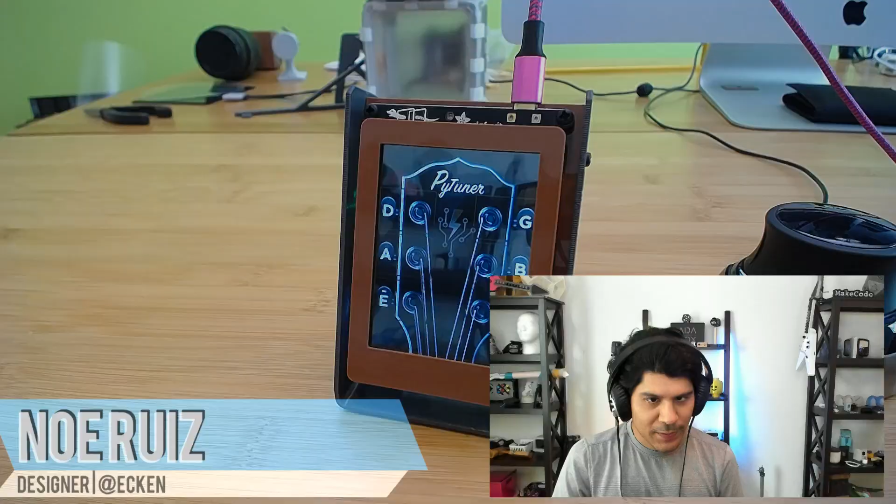In today's tutorial, we're going to take a look at the Guitar Tuner project. This is a collaboration project with Liz Clark of Blitz City DIY.

This uses the Adafruit PyPortal, and what we've done is we created this two-piece enclosure slash stand, and the Guitar Tuner has this nice touchscreen with some graphics.

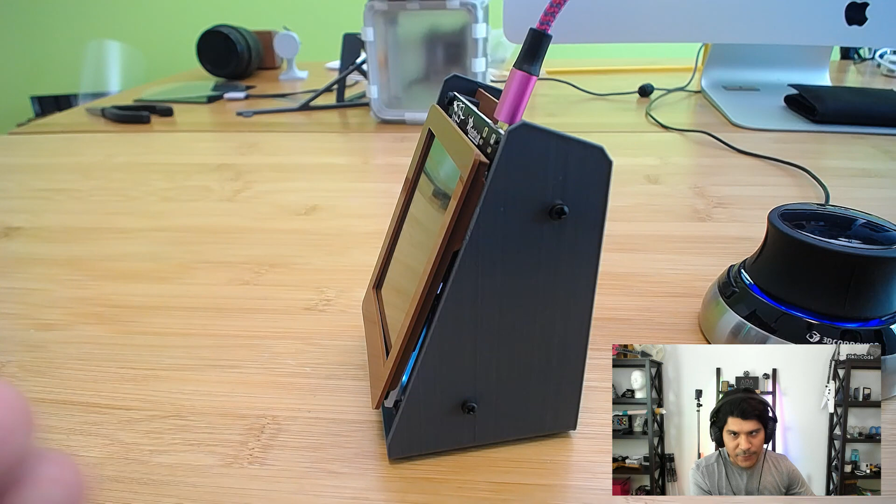So you can tap on any of the pegs and get some audio so you can tune your guitar. I really like the way that this is housing the Adafruit PyPortal vertically.

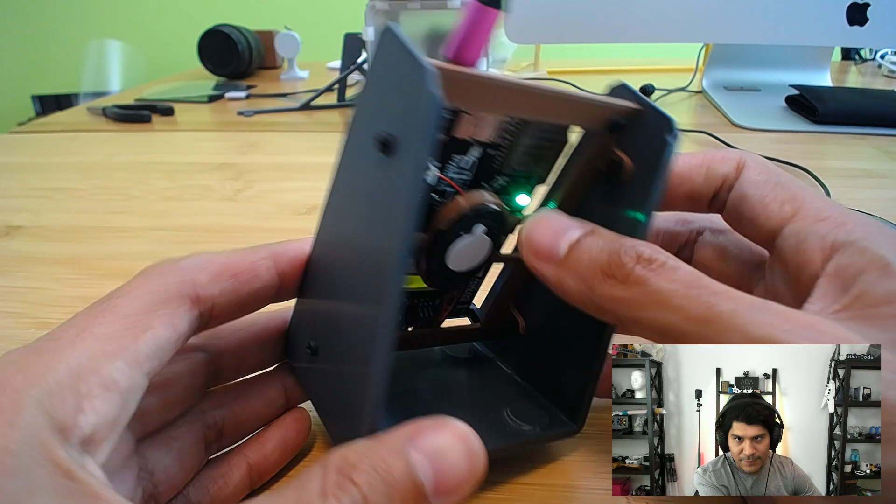We have plenty of room for extra components. There are some more standoffs that are right up here that are elevating the PyPortal PCB. And then we have this bezel here that just keeps the screen nice and kind of flush here. So that's how that's going.

And then we have some dimples in the bottom here for some feet. Those are pretty neat, they print nicely without any supports. And then there's some gap here so that we can have some wires pass through if we ever want to use those stemma ports for extra components.

So it's really cool. I like the way it's driven in Fusion 360. We have full control over all of the different angles using just one sketch.

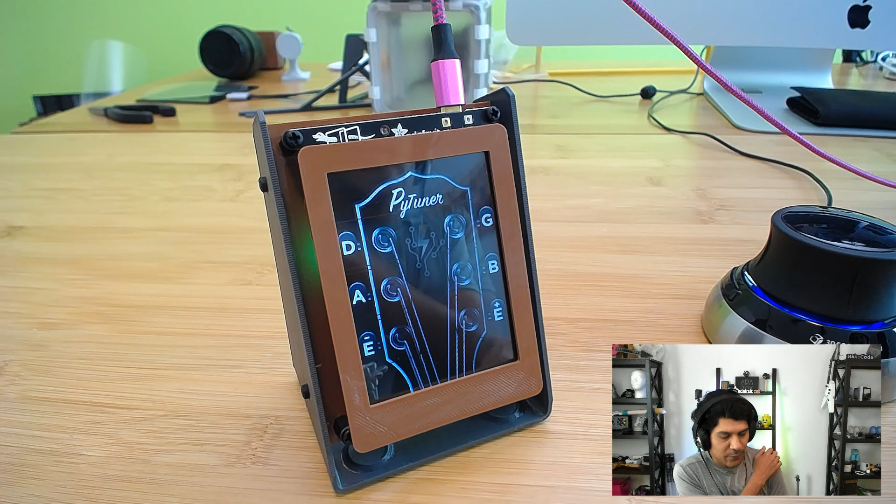So I want to show you guys how you can create this type of enclosure stand with just one sketch, and it's really cool to kind of change it and modify it and really change it a lot by just modifying a few different parameters. So let's go ahead and jump into Fusion 360 and take a look at designing it.

So here in Fusion 360, I've got a blank document. Let's go ahead and save it. So I'll go ahead and save this out as like an arcade cabinet for PyPortal, why not? I will save it in my little Layer by Layer folder here. Gotta have a little bit of structure in my work.

And then what I'm going to do is bring in the Adafruit PyPortal a little bit later. I kind of want to flesh out the sketches before I bring it in.

So the first thing we can do is, after of course saving your document, we can create a new component. The way I'm thinking about it is I want to have a component that houses all of the things that pertain to the enclosure. So I'll have two things: a frame and a PCB mount, or let's just call it a plate. So for this, I'm going to call it enclosure.

And then I'll go ahead and create my two components. So I'll have a frame. And then I want to make sure that the enclosure is selected, because now when I create a new component, it'll be inside of enclosure and not inside of frame. So you kind of want to think about that when you're creating your components. Where is it going? And what component am I currently in?

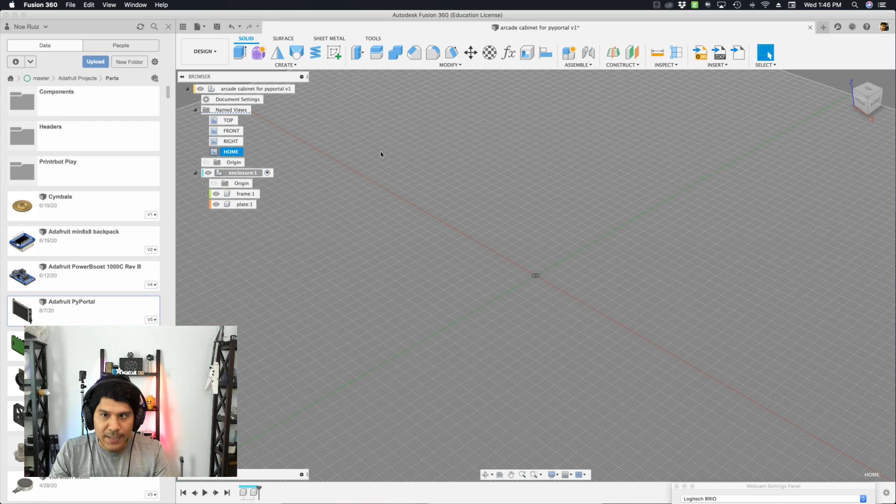But I just like to design with the default view in mind. In this case, I want to have the screen up here, and then back here will be all the stuff in the back. Even still, a lot of the times I'll design something without thinking about the default view, and every time I open the design, it's facing the wrong way or just backwards. So it's a nice little thing to keep thinking about, where am I designing this in space in my default view. Now with that out of the way, let's go ahead and draw a sketch.

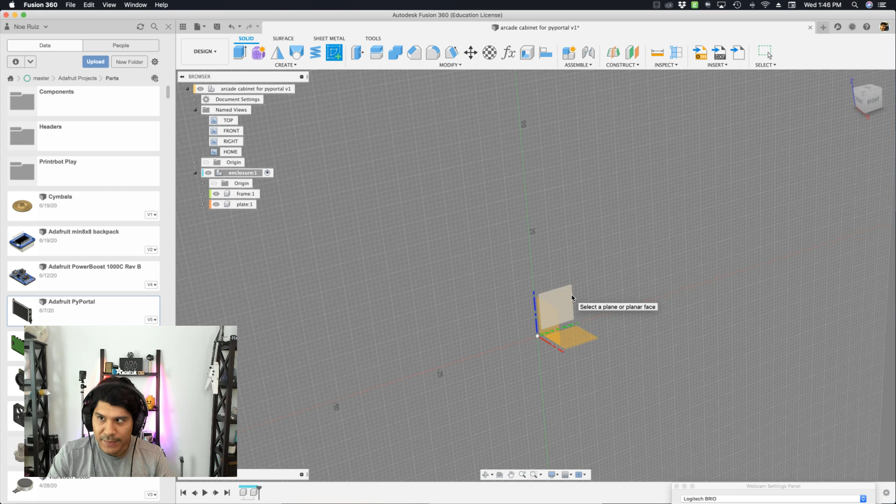So for this, it's all really about the profile, the side of our frame, and that's the main shape that we need to draw. Just think about an arcade cabinet and how that side panel is really the defining shape. For this design, we are going to use the side plane to sketch on.

Another thing that I really like to do is to really use the origin. Sometimes I have a symmetrical design and everything is centered around the origin, but for this one, this is more like the bottom corner of my enclosure.

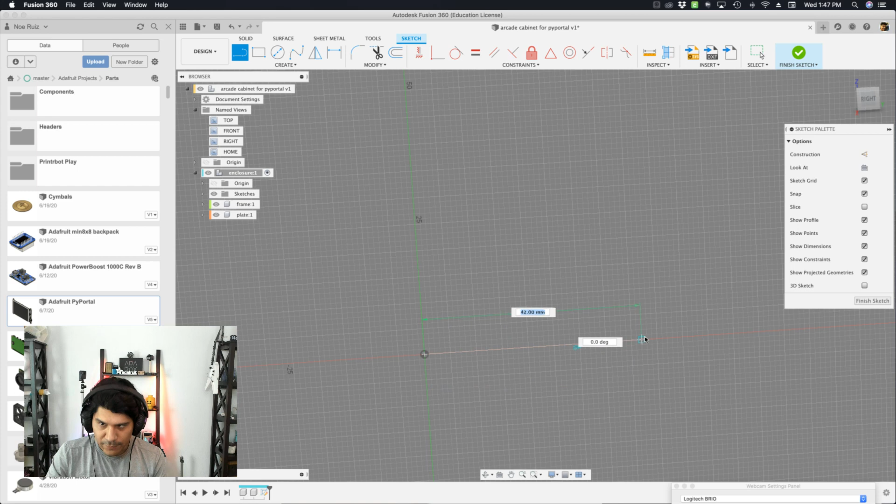So what I'll do is start drawing some lines like this. I'm going to start from the center, work my way out, get something up, let's go across. Then we're going to have this sort of slanted line, and then I'll have a straight edge going back down again. Okay, so now I have that.

The next thing I want to do is start to define some dimensions. I'll start with the bottom, let's bring this out. 45 is okay. I'm going to worry about scale a little bit later, because I think it's okay to figure out that later. This will, let's say, 60.

And then for this, I really want to define the degrees at which it's sitting. So from here to here, I want to say 70 degrees. And then this line itself, I want to define with a hard number, let's say 10 for now. Now you can see that it's pretty much defined.

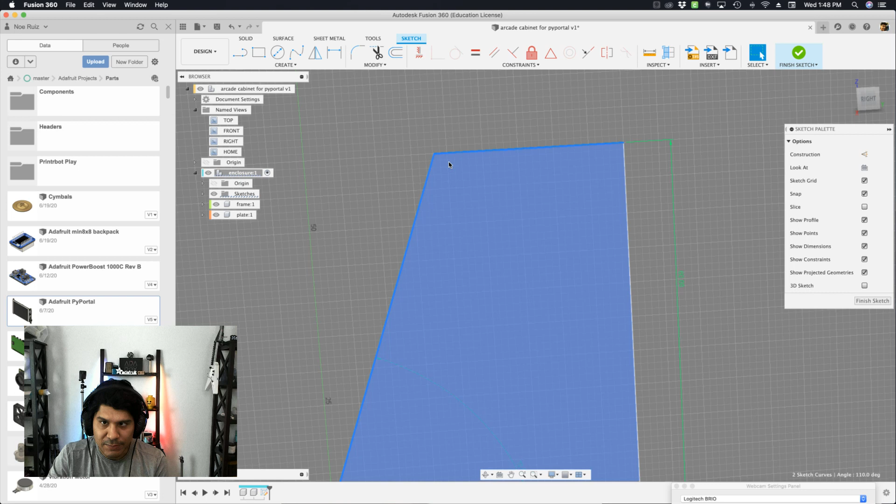So what I'll do is select this line and this line, holding down shift so I can select both. Then right up here in the top menu of the sketch environment, I can hit perpendicular, and that'll make it nice and perpendicular. So these two lines are now perpendicular. And why did I do that? You don't have to, I just like the way that looks - I think when I'm printing, it just looks better in my opinion.

So all these shapes are preferences. You don't even have to have this one here. This can go straight down if you wanted to. But I think that's okay.

All right, so now that I have that kind of main thing set out, I need to think about how am I going to make the plate. So the plate, I do want it to be parallel with this line here that has that angle.

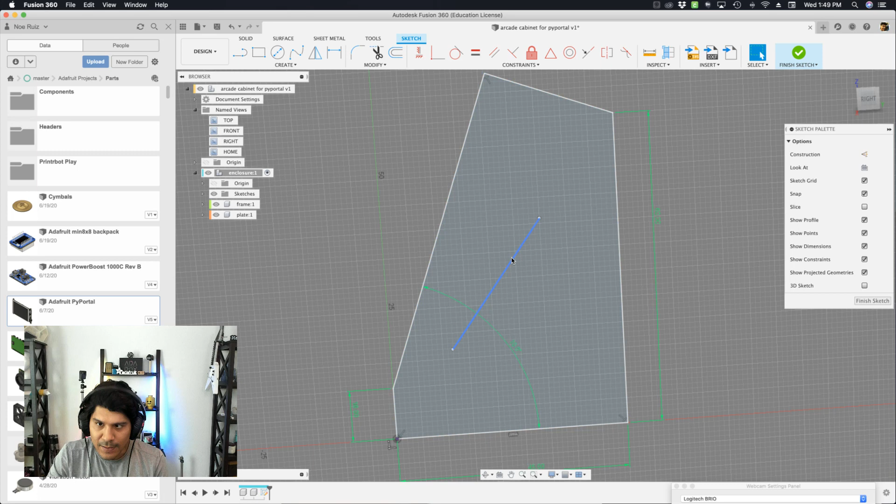So what I'll do is I'll make another line in the middle here somewhere. And thankfully, Fusion by default added this parallel constraint. But let's say I didn't have it, I have it like this. So what I can do is select this line and this line, and say I want them to be parallel with each other. Right up here, you can select parallel, and Fusion will hopefully do it. Hey, I did it, I had to hit it twice. So now I have these lines that will always be parallel with each other.

So now what I want to do is create some perpendicular lines that will connect to this line. So I'll start from one of these points here, and as I roll over, hopefully I can get that. Yep, I can get that perpendicular icon there. It kind of snaps there too, so I'll just click that to accept that.

And then I'll do it for the bottom side here. So click on the point, roll over this edge here. You can see as I roll over, I'll get different types of automatic constraints, which is handy. I don't want a horizontal constraint, I want a perpendicular constraint. So there it is, and it snaps there to it.

Excellent, that looks good. The next thing is I need to define how deep I want this to go. So one cool way is I can actually do two things. I need to define some distance between these two lines that are parallel.

And I also want to define some distance between this up here and this one down here. So essentially what I want to do is make this line always be in the middle of this line. So one really easy way to do that is to grab a line, and as I roll over this line, you're going to see that triangle come up, and that triangle is a midpoint constraint. So as I click on that, that's always going to be in the center.

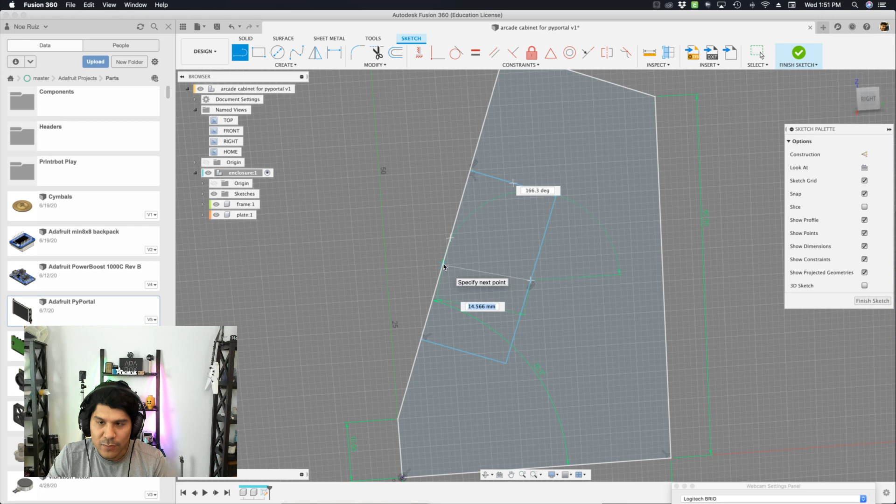And then if I start to roll over, you'll see that this crosshair shows up, and that crosshair is actually the midpoint of that line. And that's kind of what I want.

So I'll click on that, and then all I have to do is select this line and either this one or this one, let's say this one, and say I need these to be perpendicular. And now it's always going to be straight. So no matter, watch as I drag this top line, the bottom line follows it too. That's because it's obeying those constraints, always being in the midpoint of it, because that's how we set it up.

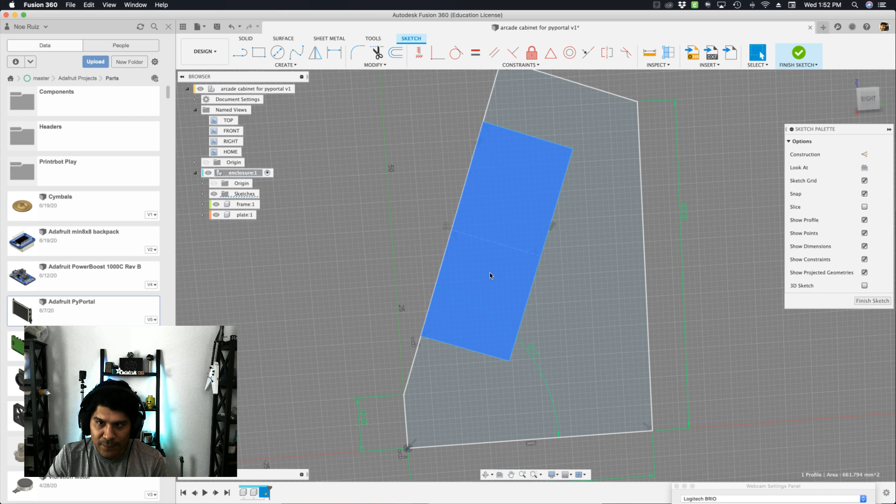One thing I want to do is remove this line, not remove it, but make it a construction line so that it no longer creates this separation here where there's two profile entities. So if I select the line and hit X on my keyboard, or just select this construction icon here, it will make it so that it does not split my entity, my shape. So now it's just being used as a construction line, as a point of reference.

So that's cool. And now I can define how much depth I want, so I can give this line a dimension. You want to be careful when you apply the dimension. I want the dimension to be parallel. So as I roll over, you can see how it's changing from going to parallel, going straight up and down, or not. So I'm going this way. So let's just give it a number like 12 for now.

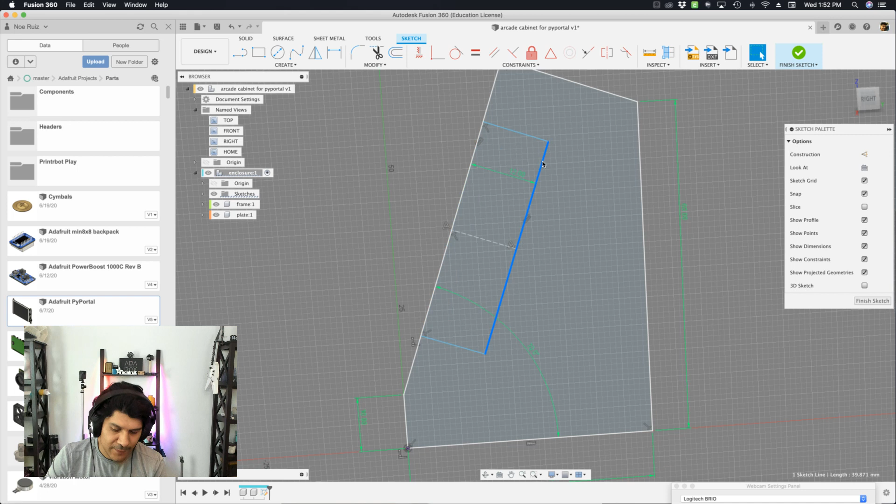And then I can also give a dimension to this right here. Again, we want to make sure it's parallel with our line and not horizontal or vertical, but parallel like that. And there's nothing special other than just moving the mouse in a different location to get that parallel or perpendicular.

So now I can apply a number here. Let's say 40 for now.

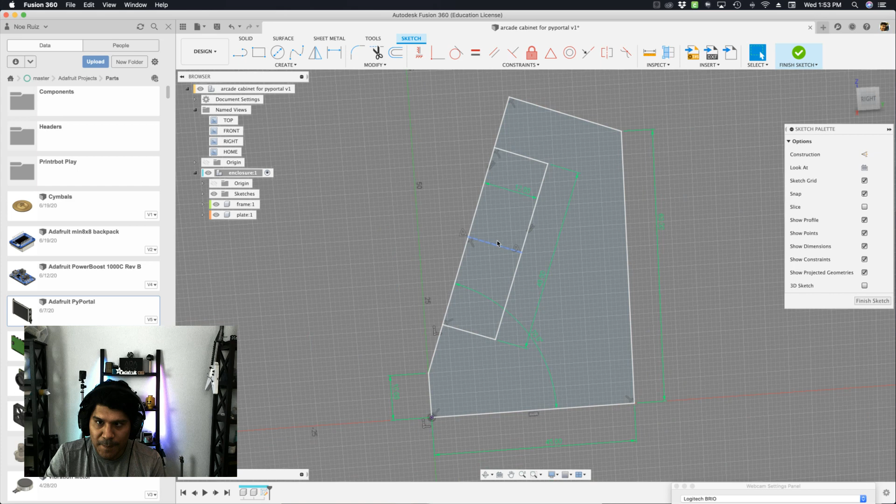Next thing I want to do is create another line, somewhere in the middle here. This is going to define the thickness of our plate, because what we're fleshing out is our plate and our frame all within this one sketch. We're in the enclosure component, so it has its own sketch, and we can reuse those inside these guys. So let's go ahead and create this line.

I got my line tool. I'll do something over here, and I want it to be perpendicular with this line here. So now that is there. I don't need to define a length of this dimension, I just need to define how far away do you want to be from this line, and then I can apply something like 1.5 millimeters, which happens to be my favorite value for thicknesses.

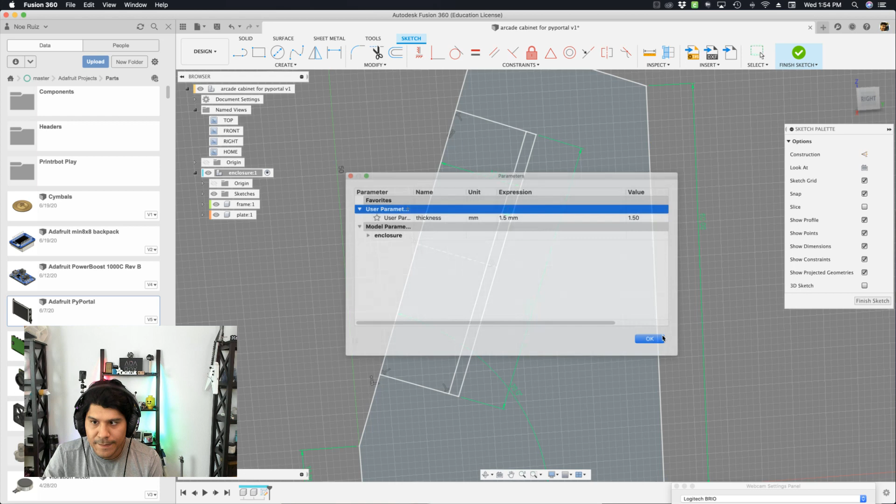While I have that, let's go ahead and open our user parameter window. I got that open, and I can create something called thickness, and make it 1.5, hit OK. Now I can go back into this 1.5 sketch dimension and just say thickness, since I'm going to reuse that quite a bit.

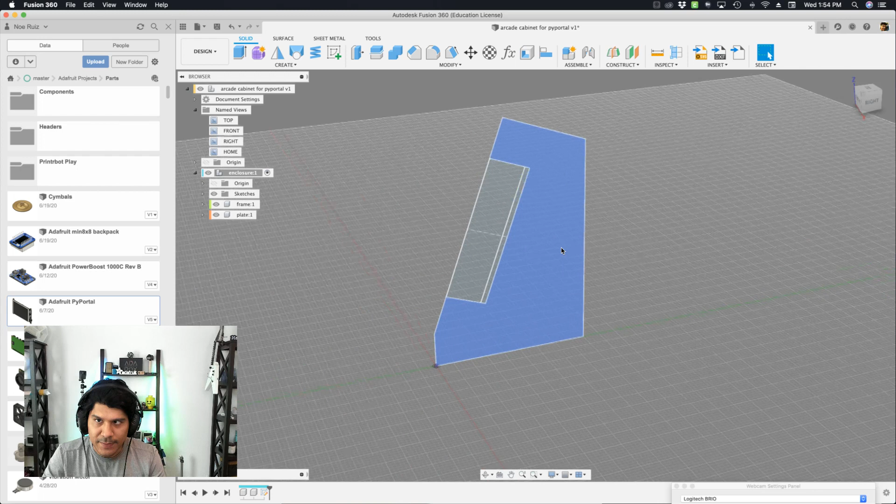So now that I have that, I want to define a width. That's the next thing I want to define. Here's our sketch, we're still inside the enclosure component, and we have the side profile of our little arcade cabinet style thing. So I'll bring up our user parameters, create a new thing, and call it width, maybe frame width or box width. I'm not sure what to call it, but width is a good thing.

So I'll give it a number, let's say 50 for now. Hit OK. And then what I'm going to do is I need to activate the component that I want to create. So what do I want to create first?

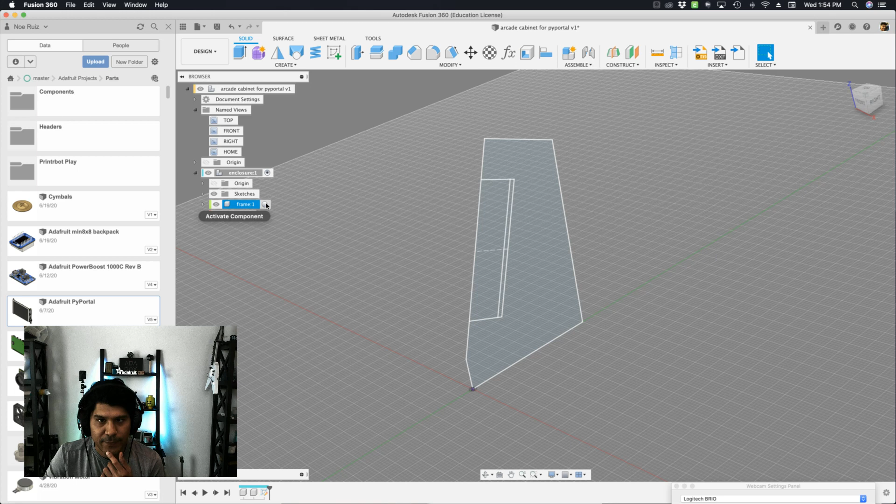I'm probably going to create the frame first. So when I select the frame, my sketch gets ghosted. It kind of gives you a UX thing where it's like, okay, just so you know, that sketch is grayed out because it is not inside of the frame component, it is outside of it. Well, that's okay, but we're going to use it anyway.

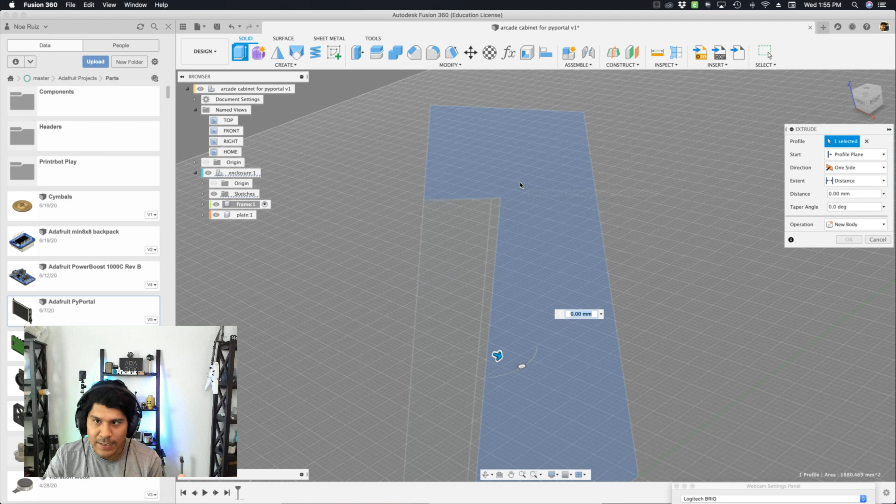So now that we have our frame active, I'll go ahead and select this, hit extrude. I actually want to select all of the profiles in that, the main thing. And then what I do is I want to bring this out. I want to change the direction from one side to symmetric, and that way I get symmetric going on both sides.

But what I want to do is change the measurement from half length to the whole length. So now 30 is the whole length and not being doubled up like the half length is. The half length says this half is 30 and this half is 30, so it's really 60. But if I change the measurement from half length to full length, this will now be 30, half of it would be like 15.

So what I want to do here is we just created our width, our box width. I'll just type in width, and select it from here, it kind of auto completes it for me. Now I have the width, that's a user parameter here, so whenever I change that user parameter, it'll always change up here. Operation is set to new body, that's all good, there's no taper angle here. So I'll hit OK. All right, that's looking cool.

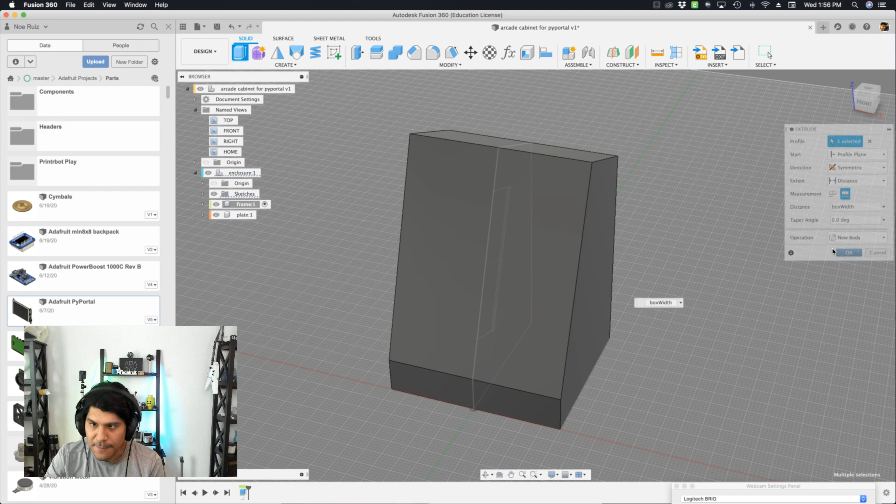So the next thing I want to do is start to create the frame itself. Instead of having to draw some more sketches or do some offsets, there's a really easy way to do it with the shell command. The shell command is a super powerful way to create a shell. And here's what we can do.

Without even creating the shell first, I'm just going to select this surface, this top surface, and this bottom surface. I also want to select this surface on the side here.

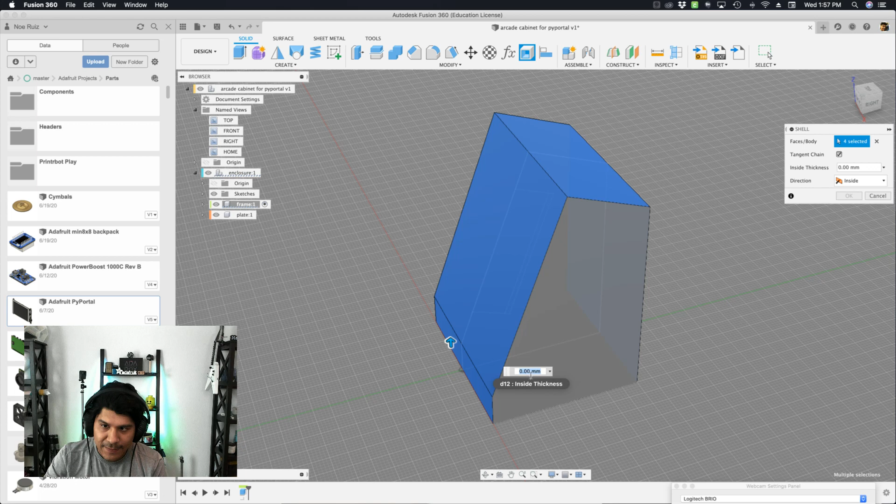Those surfaces are what we want to create a shell from. With those selected, I can click the shell button, and for the inside thickness input, I'll just say thickness and hit enter. You can see how powerful that shell is—it's shelling out everything except these 1, 2, 3 sides here. That's a neat way to do this because it's just one feature, as opposed to several features or even a sketch. Looking at our timeline, it's just that extrude and that shell, and that's looking good.

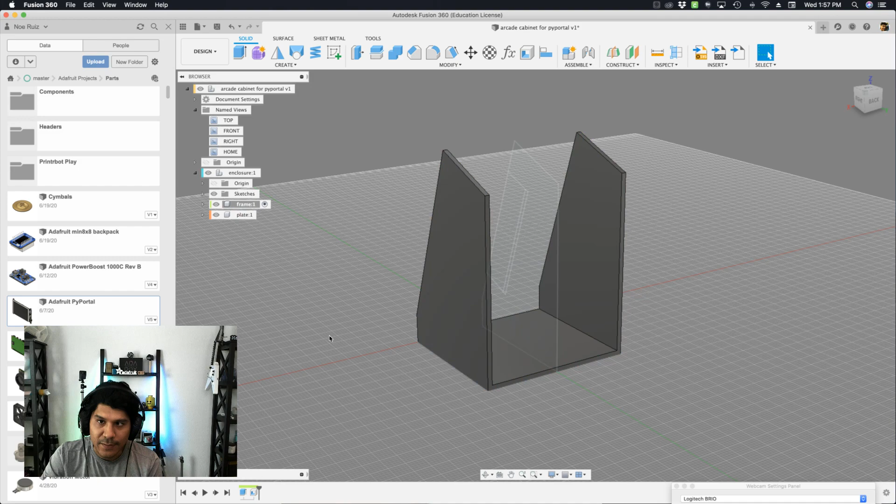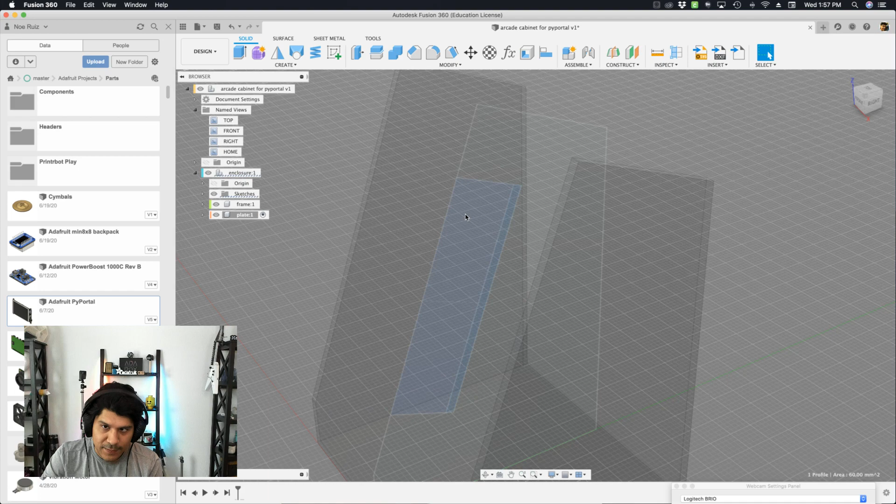Next I'm going to create the plate, so let's activate that component. Our sketch is still open—it's ghosted, but we can still use it. I'll use this one piece here, this one little profile entity. With the plate component activated, I'll hit E on my keyboard for extrude and start to extrude this out.

We're going to do similar things where we change the direction from one side to symmetric, then change the measurement from half length to the whole length. And then we're going to do a little bit of math.

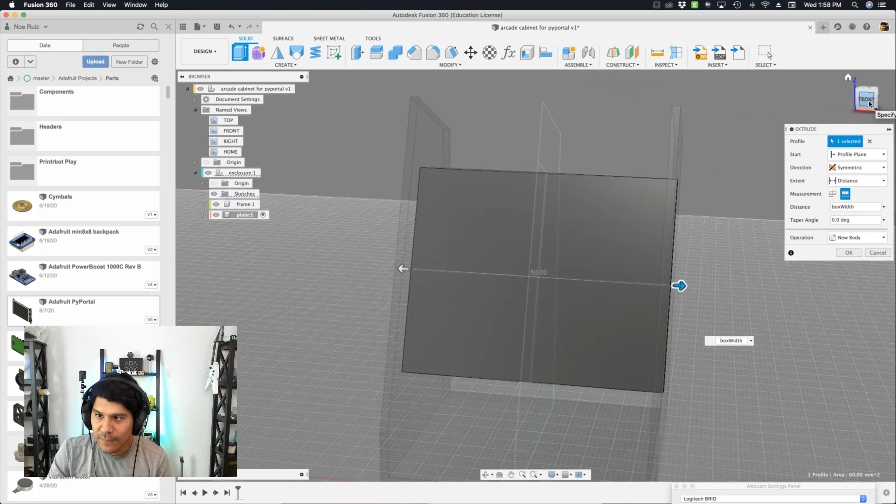We do want the width, but since our shell is doing an inside type, we're kind of crashing into our frame. So all we need to do is subtract the thickness times 2, because we have a thickness on this side of 1.5 millimeters, and a thickness on this side of 1.5 millimeters. So we've said box width minus thickness times 2. The reason it's in parentheses is because that's how math works—you need to have it in parentheses. That's a good explanation, right?

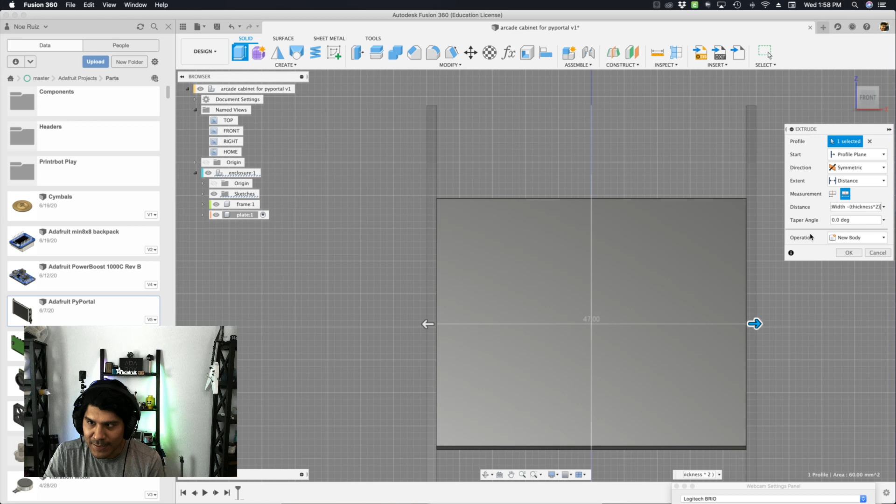We'll leave the taper angle alone and leave the operation set to new body, and that's looking pretty good. I'll hit OK. So now we've created our main objects. I'm going to go out of the plate and into the main document here, so we can see everything in all its glory.

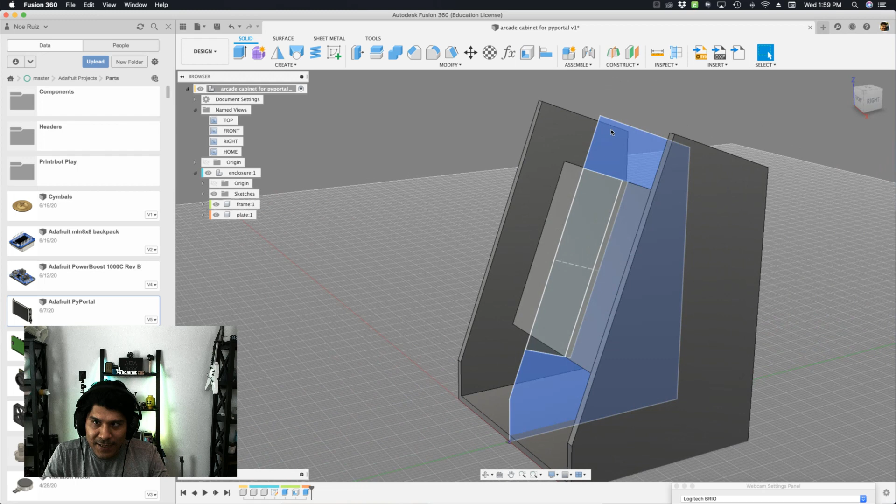Another thing I really like to do that's really powerful is with the sketch. If I want to tweak it, a lot of the time I'll double click on the sketch. When we do that, our timeline goes back in time before we've done any extrusions or other work, and that's kind of hard visually to tell how I want to tweak it. So instead of jumping into the sketch, we can do something a lot better.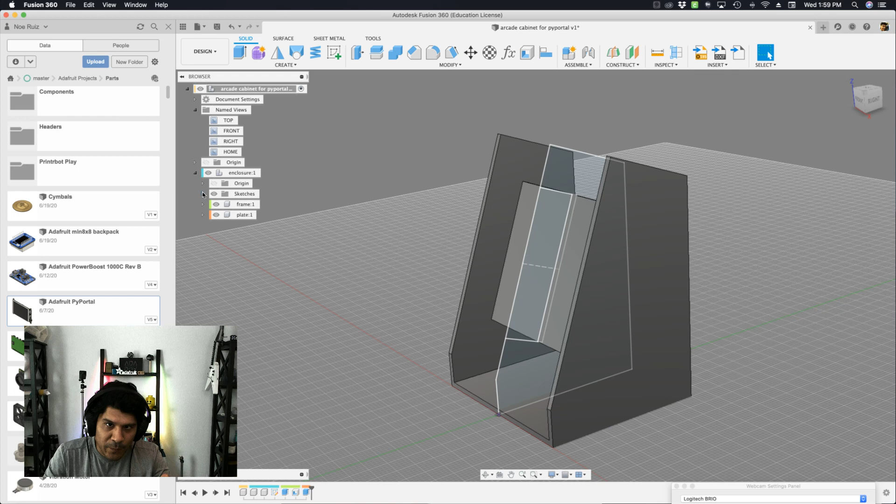We can open up the sketch in the browser, right click on it, and say show dimensions. I use this all the time now. For sketches where I'm still figuring things out, I'll always right click on that sketch and say show dimensions—right now it's set to hide dimensions because I just showed it, so let me do it again, show dimensions.

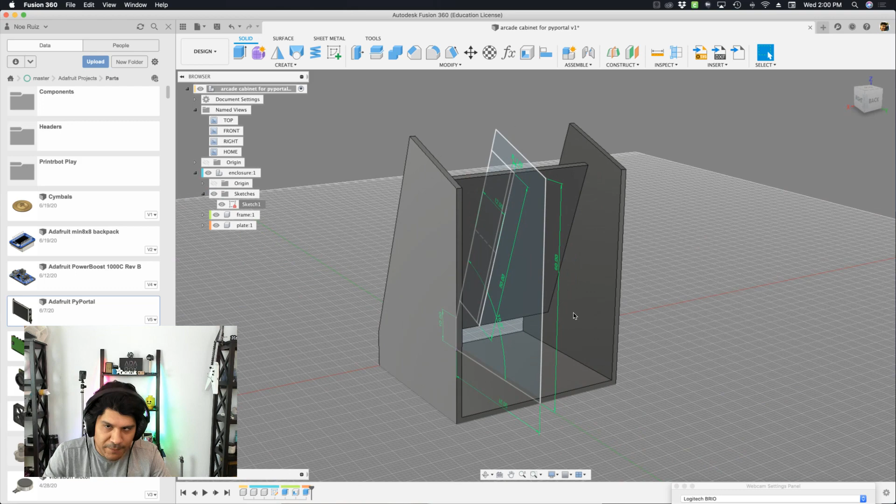This is really powerful because now I can say I want to change that 40 to 50, and I can see that change instantly and visually, without having to jump in or think about how it used to look, because that's just the way editing a sketch normally works—it'll just bring you back in time. But if you do a show sketch, you can edit your sketch in the current time or wherever you are in your timeline, which is pretty neat.

And then at some point, it's going to be really nice to be able to change the degrees here. Let's say you want this to be 65. You can push it back. Maybe go even lower to 50.

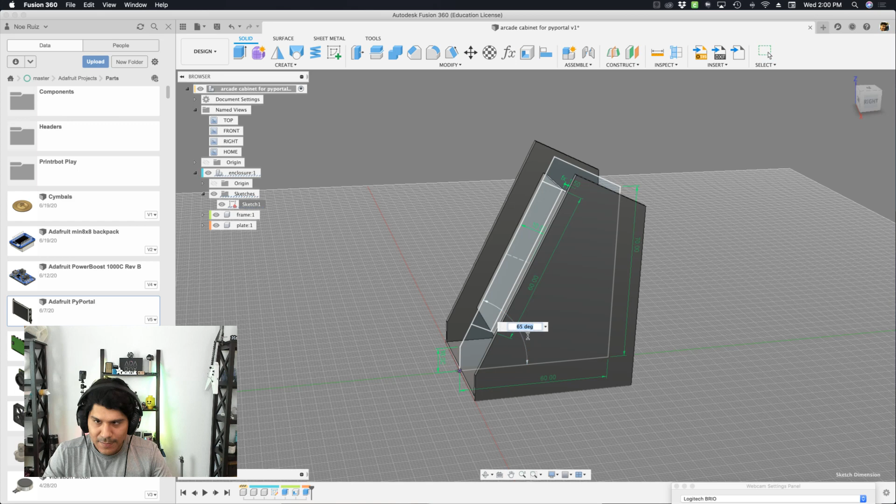You can see here you really want to be careful with your values as you tweak them, because the other values will need to be tweaked as well. Let's say we want to make this go taller, that's 220. You can just keep playing around with these values until you get a fit that matches your application, whatever you're trying to do.

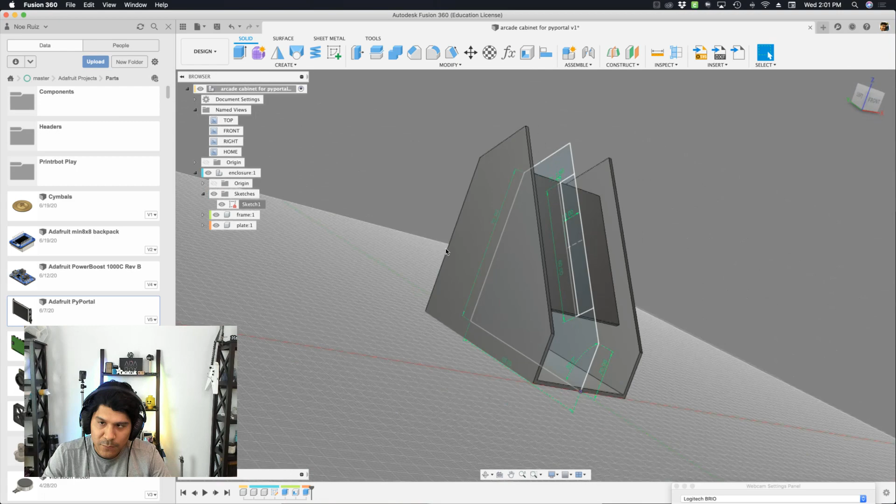So this could make a really good Stream Deck type thing. So that's cool. Now it's starting to look really skimpy on the width.

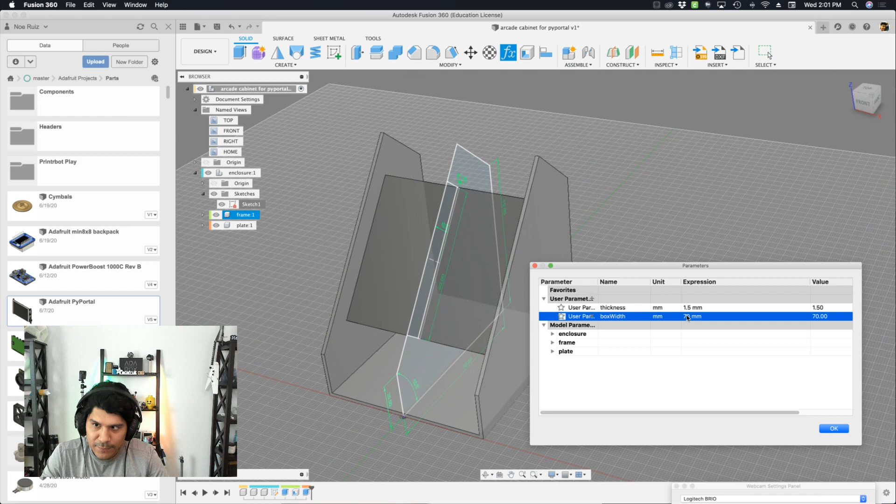So if I want to change the width, I'm going to go into my user parameter window, and then I'll change that 50 to, let's say, 70. And it's starting to widen out there. It's instantly changing, which is great because we don't have that much stuff in the timeline yet, so it's able to quickly update, which is super cool.

And I have full control over everything here because I'm just driving everything with one sketch. That's pretty cool. Even the thickness could be changed as well. Let's say we want to go even thicker, go to 3. You can see everything, including the plate, anything that has that user parameter will update. I'll bring it back down to 1.5. That's really cool the way it changes like that.

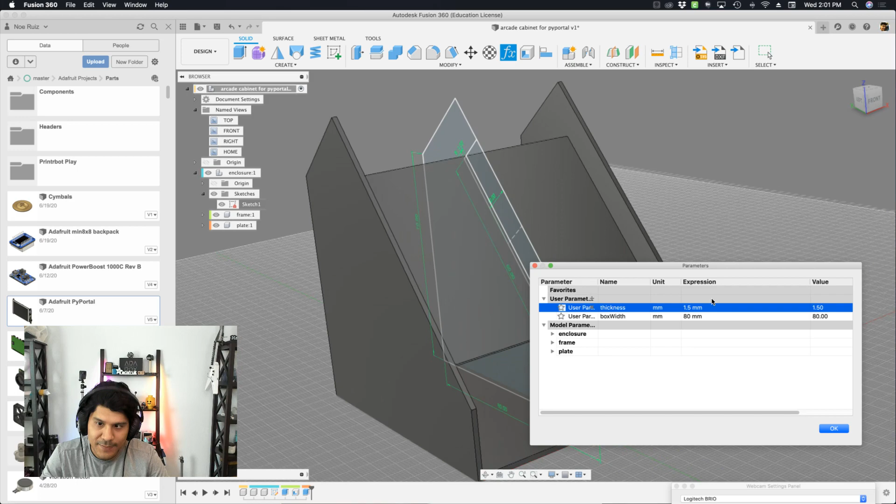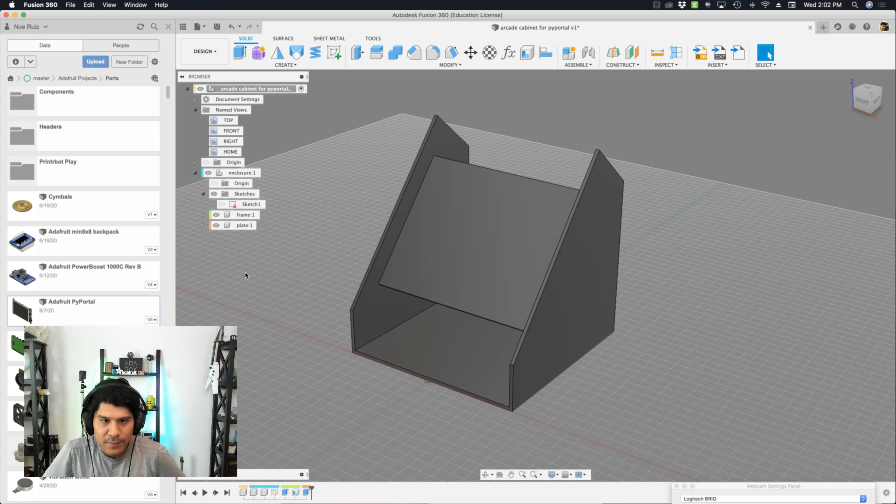All right, so now that we have that, we need to create some mounting holes for our PyPortal. Normally what I would do is import the PyPortal, and then project the mounting holes onto some existing geometry. What I found in practice is that's okay, but a lot of the times it's better if you don't do that, because then you're not creating this linking, and if something happens to the PyPortal, it's going to lose that reference point.

So I'm just going to create some holes in here. What I'll do is activate the plate, because that's where I'm going to create the mounting holes, so we can secure a PyPortal to the plate, not the frame yet, the plate. So I got the plate. Now I need to figure out where I'm going to draw it. I'm going to draw it right on this surface.

So I have that surface selected, and then I can draw right onto it. When I click that sketch button, you can see that my grid now is lined up flat, or at an angle with the angle of the plate, because the plate's already in that angle that we've defined with the sketch.

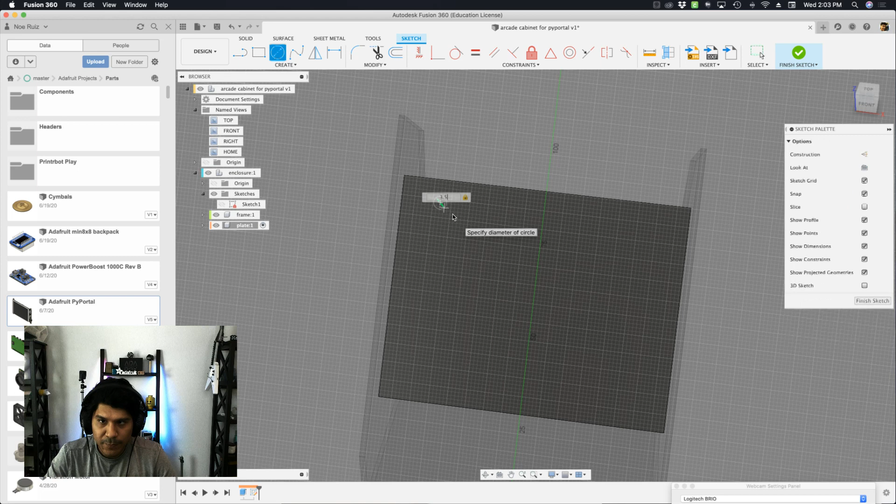So now that I have that, I'm going to create 4 holes, or maybe just 1 hole, maybe 4 holes, yeah. So let's do 3.5 for that. Create another hole over here. It's really a circle, not a hole.

One over here. And then one of the things I like to do is use a line to connect these 2 holes together. And then I want this line to be horizontal, like that. So I just applied that.

Now I have this. And then I need to create another set of these guys, so I'll use some more circles here. Let's say 3.5, over here, 3.5. And then again, I'm going to use a line to connect these 2. This will be horizontal, like that.

And then what I want to do is create another line that connects this line to this line. Now I can see that that's not straight, so I'll click on that line and say I want it to be vertical, like that. Cool.

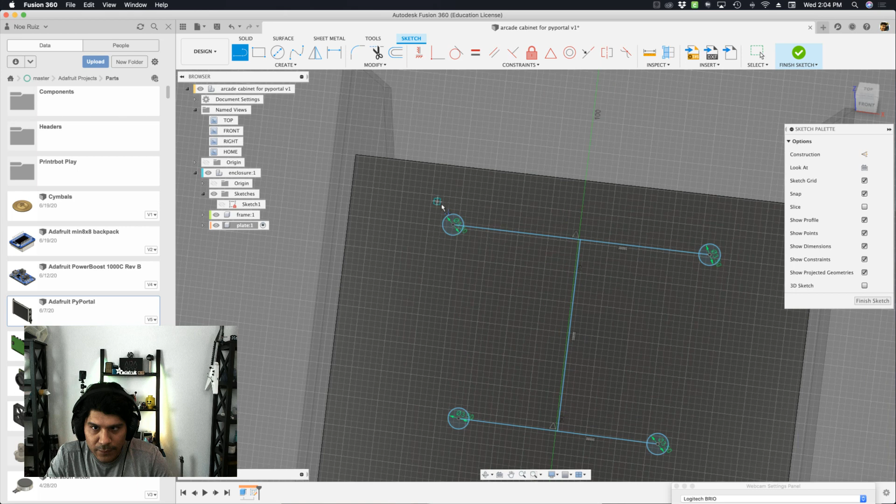I could also come in here and say I want these 2 lines to be equal, so why not just use another line and connect these like that, and then select that line, make it horizontal or vertical. So now I'm creating that. As I move this, it's becoming symmetrical like that. So that's really neat.

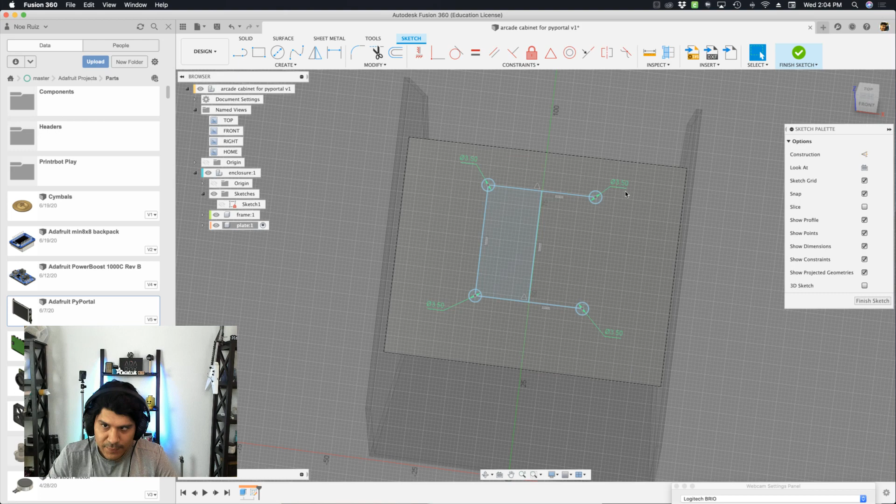Right, so now I actually need to tell these lines, I need to assign them some dimensions. And the dimensions, I'm just bringing these out because I really like to have them outside of the circle. So that's helpful. I like to position my sketch dimensions in a way where I can access them and I don't have to zoom in too hard.

So now that I have these set up, I need to open up the PyPortal itself. Luckily I have it. This is a good segue into getting our files, our 3D models. Every Adafruit product has a Learn Guide.

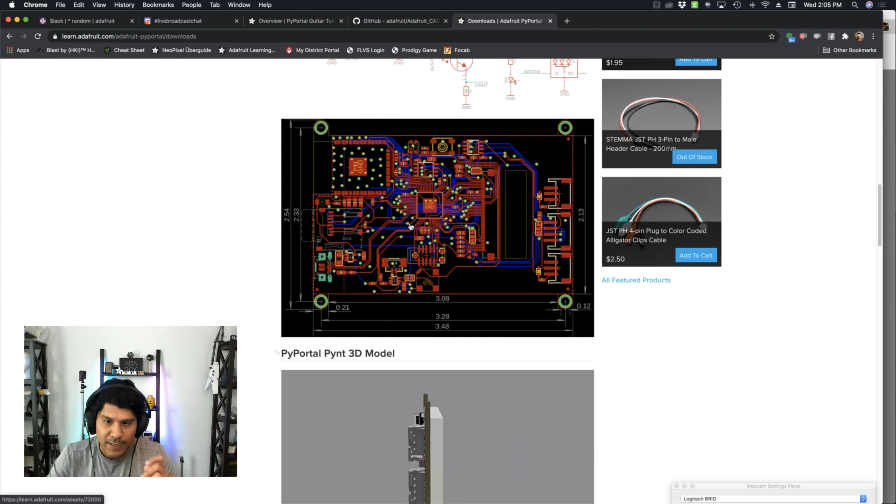In the download section of that Learn Guide, you will find data sheets, 3D models, and Eagle CAD models, if we haven't made a 3D model yet. So you can get fast access to those files. They're all free to download in whatever file format.

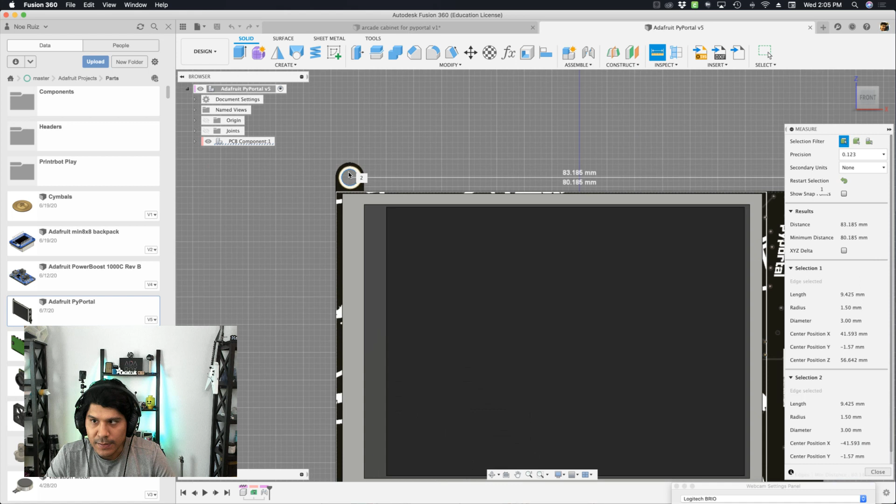We tend to upload in STEP format so that folks with different CAD packages can use it. So here's the 3D model. I'm going to use my measurement tool to figure out the distances between these holes. The hotkey for that is I for inspect. I'll select this circle, and then this circle, and we want to use the distance here. You can see there's a minimum distance, but we want the whole distance, which is 83.185 millimeters.

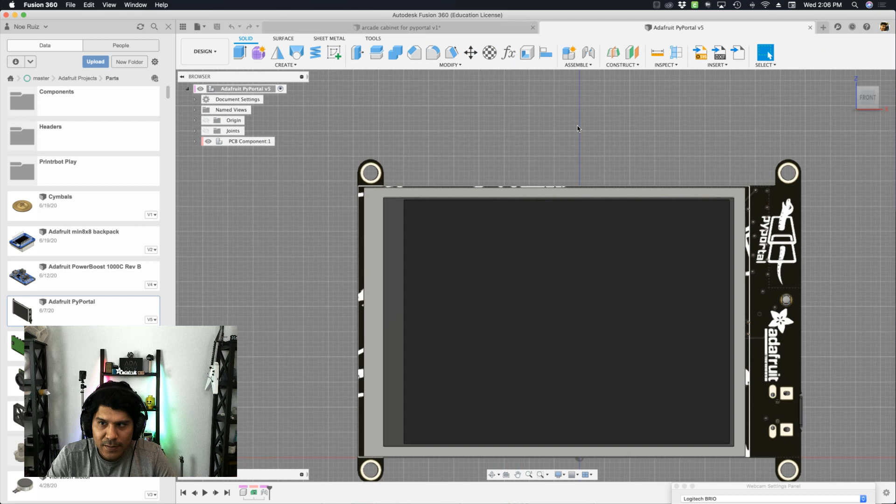So we'll jump back over to the other tab, and I say that this one needs to be 83.185. You can see already that our enclosure needs to change, since PyPortal is way bigger than that. I think I'm doing it wrong. Yeah, I need to have the PyPortal vertically. So this value actually needs to be this vertical line here. And you can see, yeah, that needs to be changed too. So I'm going to do that next.

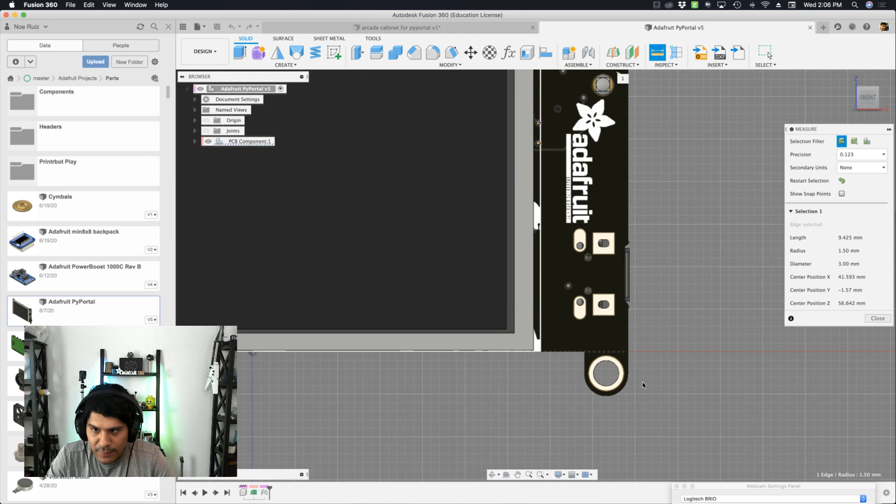Let's bring our inspection measurement tool back up. We'll say, what is this hole, and how much distance is it away from this hole? That's 59.182 millimeters. So let's update this and paste that in there. And now we're looking at a real one-to-one representation of this.

And then I can start to figure out how to get this to be in the center. Our origin is still here, and it is the absolute center of this whole piece. So I can start to make a line, starting from the center so I know it's in the middle, and then to this guy over here, which is also in the middle. Then I can say I want this to be vertical, so I'll apply that, and then give it a number.

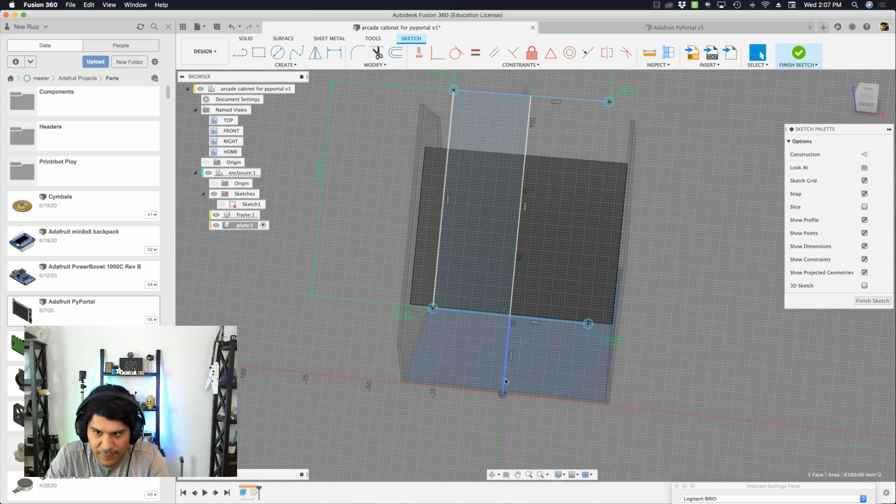I kind of don't want to do that though, because if I ever change that, I'll have to keep changing this number. So why not, instead of doing this line, I'm thinking on the fly here. Instead, I think I could just bring in a projection of this line. That way, if that ever gets updated, which it will, we can have some rules set so that this is always a certain distance away from this edge. So we can do that.

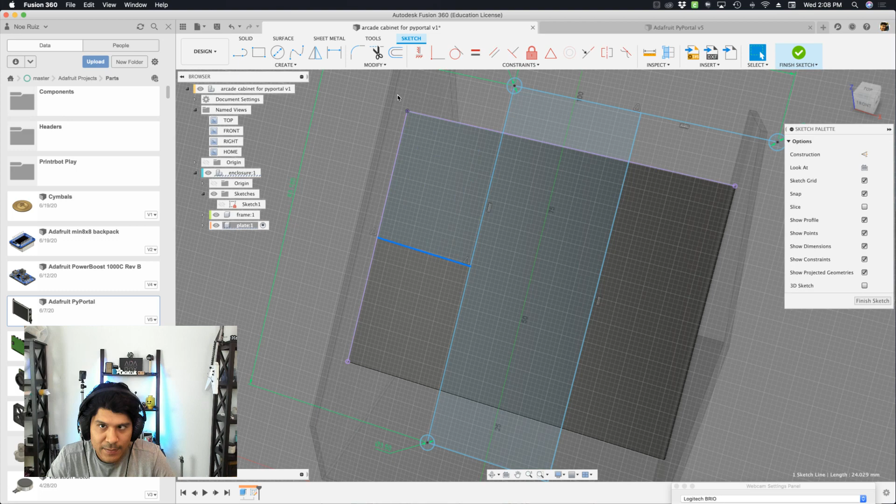I actually want to use this edge here, because if I bring this edge in, I can apply some midpoint constraints to say I always want the PyPortal to be in the middle of our plate. So I just did that by creating that line and applying those midpoint constraints. I just want this line to be horizontal all the time, nice and straight. So I'll click that, and now I got that.

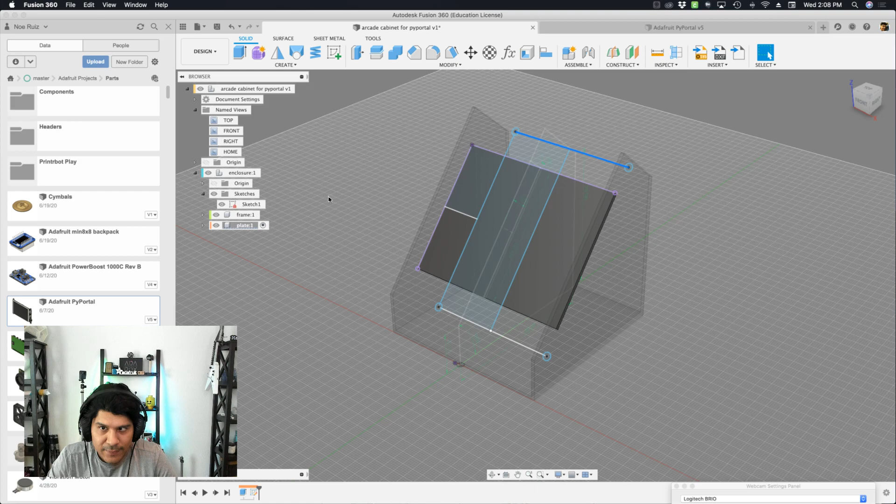And then I probably want to do, as you can see, I can't really change it yet because I definitely need to update the plate. So we need to get out of here for a second and start to tweak the plate so that it encompasses those mounting holes, because right now they don't. So now that we have it open, I'm going to go into our main component so I can get a better visual look, and my sketches are no longer ghosted.

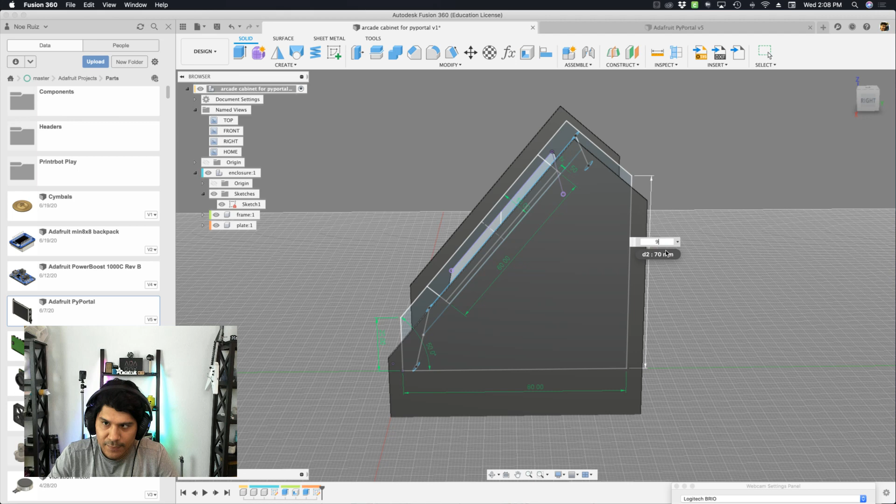So now I can give some more values to this thing. I need to give this a little bit more length, more tallness, so let's go with 90. And then this right here, the 60, which is defining the length of the plate, I'll make 70. Then I'll keep playing with it until I get those mounting holes covered. Let's go with 90 — that's looking way better. So as you can see, it's getting there.

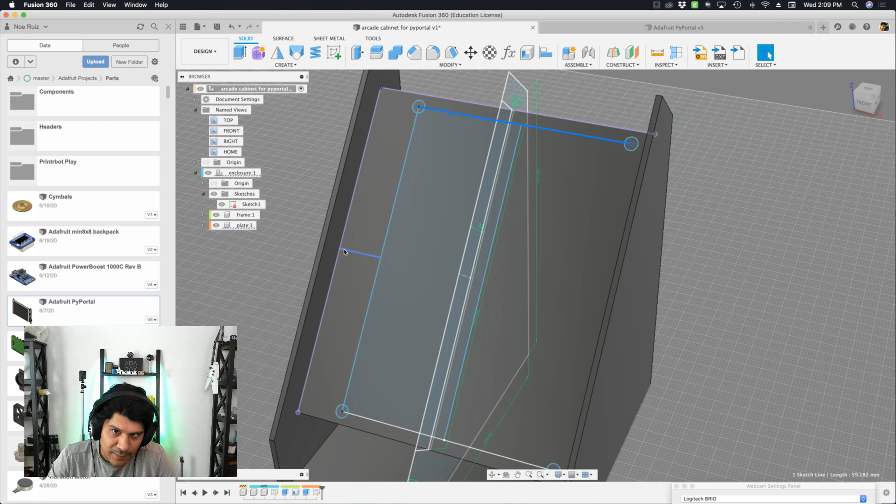The whole goal here is to get everything to be symmetric. So we've got these midpoint constraints here. Now I need to create a midpoint constraint up here. So let's go ahead and jump back into the plate.

Let's hide the main sketch since it's in my way. Now I'll create a line in the center of that, centered with the center of that. Then I can start moving it around, and I'll make it vertical so it's always straight up and down. Now you can see it's centered with this line and centered with that line.

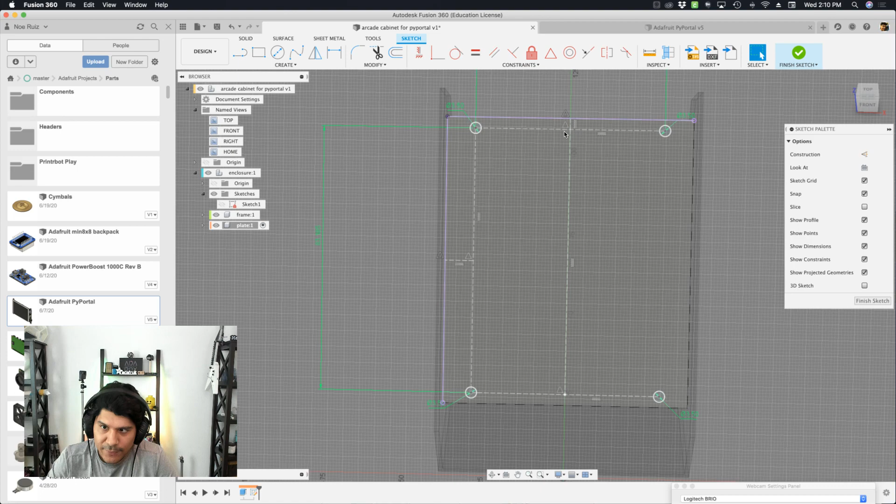This whole set of holes has fixed numbers because those are going to be our mounting holes for the PyPortal. So what I want to do now is select these lines and create construction lines so they don't intersect and split my holes when I'm using them. I'm just selecting them and hitting the X key, the shortcut for creating a construction line.

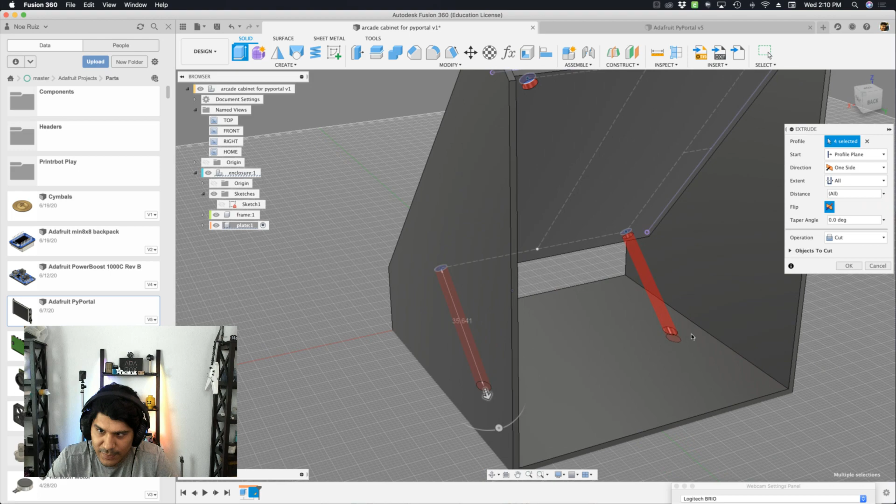So now all I can do is select those holes. Let's hit finish sketch, select that hole, all 4 of them, and then we're going to cut them, extrude inwards like that. Let's change the distance to all—or maybe not all, because it looks like it wants to cut that down. Let's say to object and select the back of our plate, so that if our plate ever changes thickness, it'll cut through all of that. Hit OK.

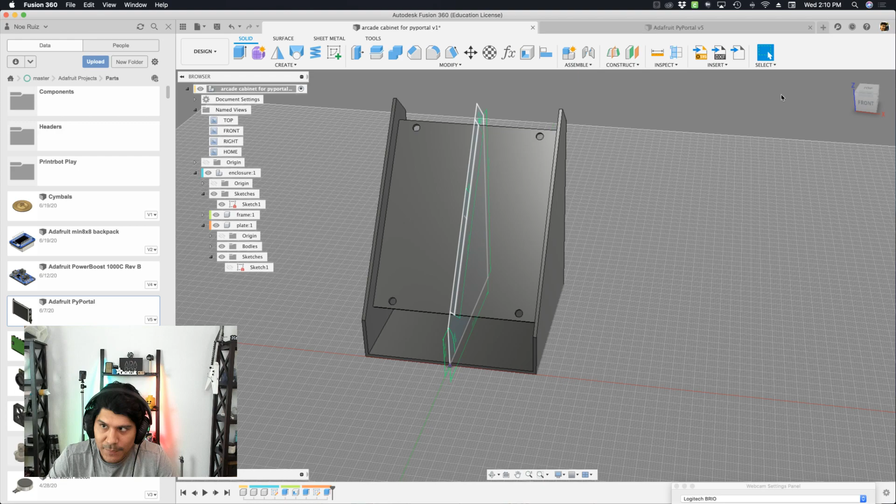Okay, here we are, we've got our sketch here. I'm going to hide it for a second, bring back our main sketch, and then activate the whole component. At this point we have our mounting holes, our plate, and everything's situated.

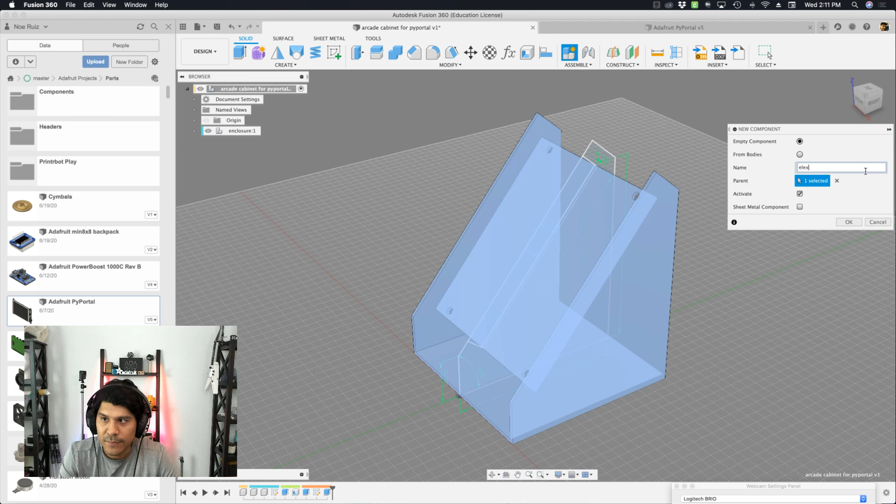Now what we need to do is import our PyPortal and see how it looks in place. One thing—if you're going to use multiple electronics, I'd recommend creating a new component and calling it electronics or parts or something like that, so you can have it nicely grouped inside a parts folder.

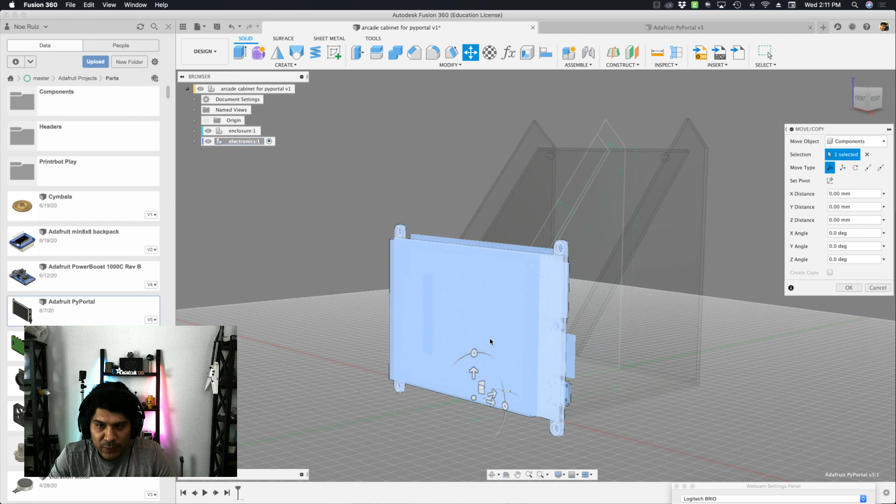So I'll bring in the PyPortal now, right click, insert it into current drawing. It's going to bring it in at this orientation. What I like to do is reorient it using these handlers, reposition it as closely as I can, and then apply a joint.

It's a little difficult to see because the way Fusion brings it in, it's all blue and I can't tell what's what right now. I think that's the USB port, and I want that USB port lined up, facing up. Bringing it in got rid of that weird highlight view that I don't like, which makes it challenging to see.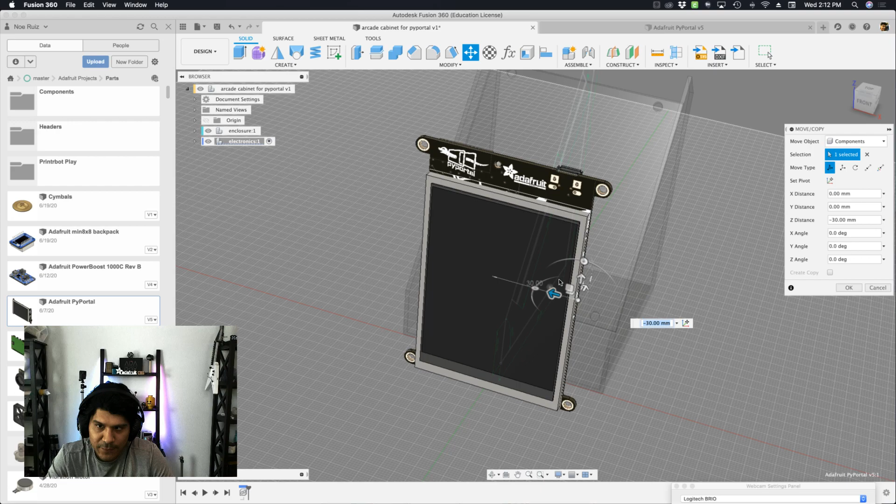I'm just moving it around, because if I hit OK before moving it, you're going to have to capture the position—that's an extra thing you don't need in your timeline, since you can do all the work here before hitting OK. It's a little slow here because I'm streaming or recording this, but that looks good. I'm going to hit OK.

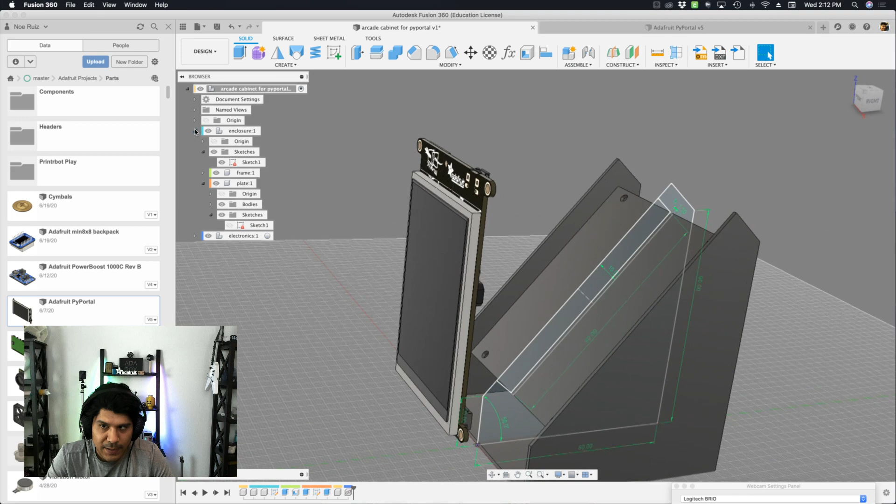Nothing's here other than the import. So now at this point I will select the whole document. I probably want to hide that sketch. Now what we can do is apply the joint to any of these holes—we just need one hole.

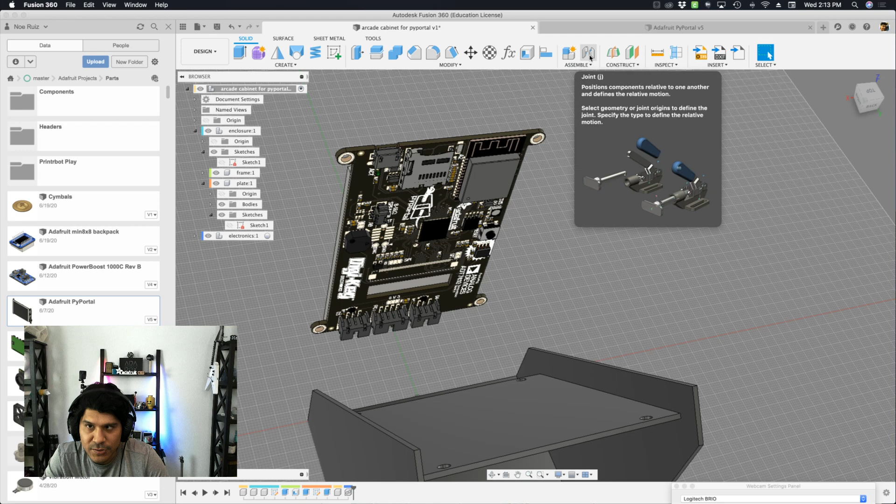Whichever one you pick, just make sure it's lined up with one—I don't want this tab joined with this hole because that doesn't make sense. So let's bring up our joint tool under Assemble. J is the hotkey, or you can just click that icon. I want this mounting tab here, this hole, joined with this hole here on the plate.

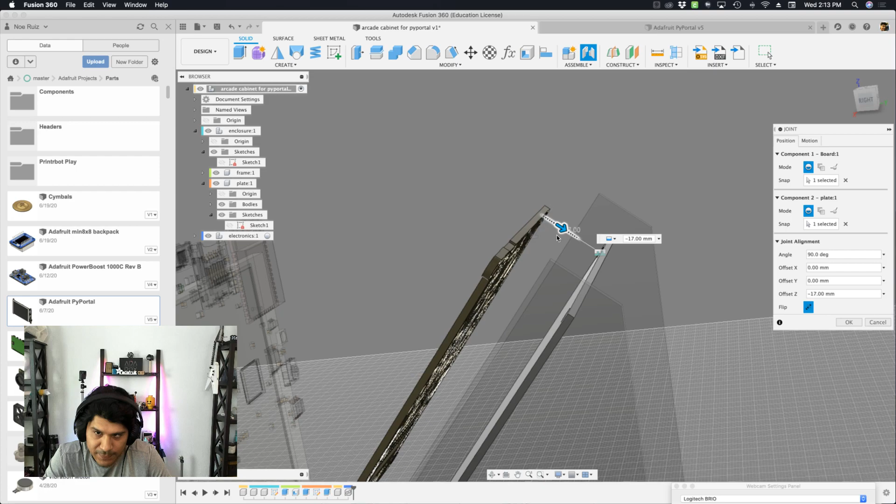Let's see how Fusion snaps it down in there. Now, this is cool. You have some offsets, your joint alignment. You can add some offsets here, and we do want to have some offsets. I'm actually going to not have it flush with this plate. I need to elevate it away from the plate because there's quite a bit of components on the back there, and that wouldn't work out. I'm going to use hardware standoffs to actually elevate this guy, and my standoffs will have a fixed number of 10 millimeters in length, so I can apply that there.

Now, this is still in joint mode. Fusion won't render out all the components until after you've hit OK. So if I hit OK, because of the way the model has joints associated to this model, everything gets fixed once you hit OK. So now we have this floating PyPortal, but that's because we've added that offset.

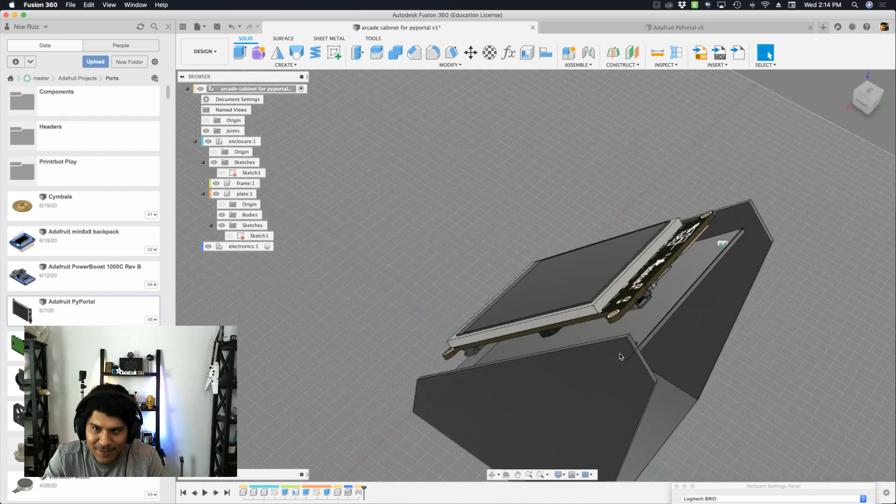But at this point, what we can do is bring out the main sketch and start to manipulate it and fine tune it to where we really like. So whether we want more room or more elevation or less elevation, it's pretty simple to do so now.

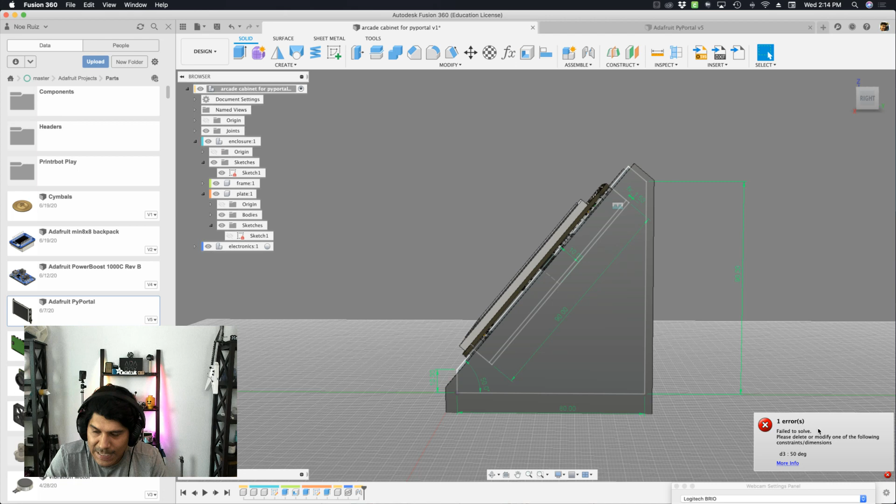I've been meaning to try out a 45-degree viewing angle. So I think this will kind of crash into it, let's see what happens there. If I change this 50 to 45, it won't let me. It's like, hey, there's going to be some problems there. So I'm probably going to have to make this wider, this taller, and now I can go down to 45 and see what goes on there.

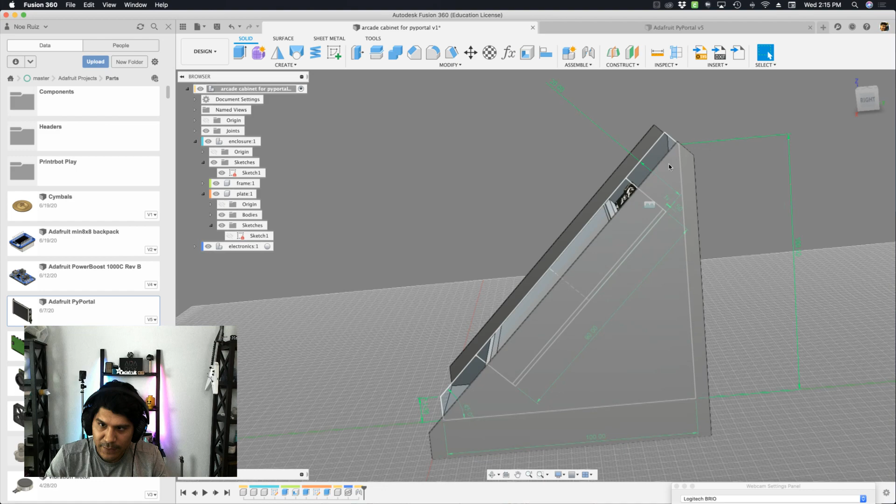Yeah, you can see here. I can add some more depth here by changing this value from 10 to maybe 20, and it brings it more in. Maybe not so much, maybe just 15. You can start to really massage and fine tune it.

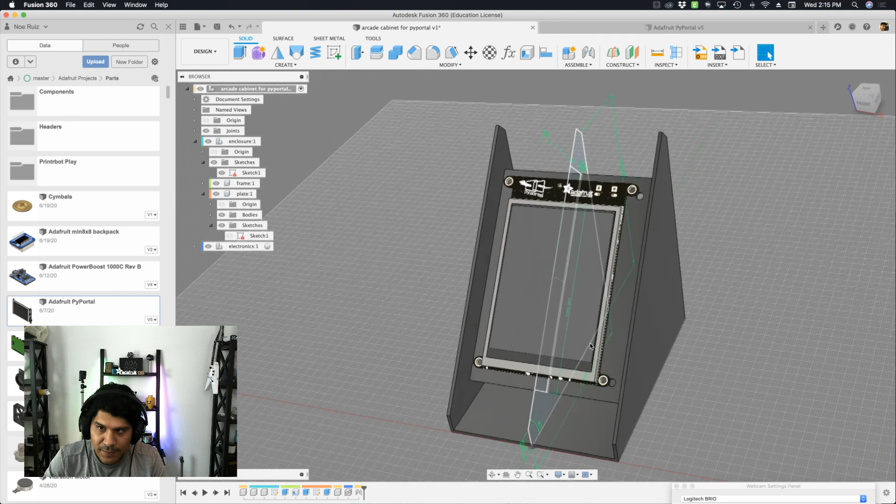I kind of want to bring in, I want to make the plate taller because it looks like those holes are pretty close to the edge there. So all I got to do is just change up this 90. Let's make it 100. And now it's taller, depending on how you want it, right? And that's looking definitely different.

Yeah, I don't know if I like it. I like better how it was. Maybe change this 45 to 60. And that's looking more like an arcade cabinet, which is what my original idea was. Yeah, you can just keep playing around with these numbers until you get something that really matches what you want.

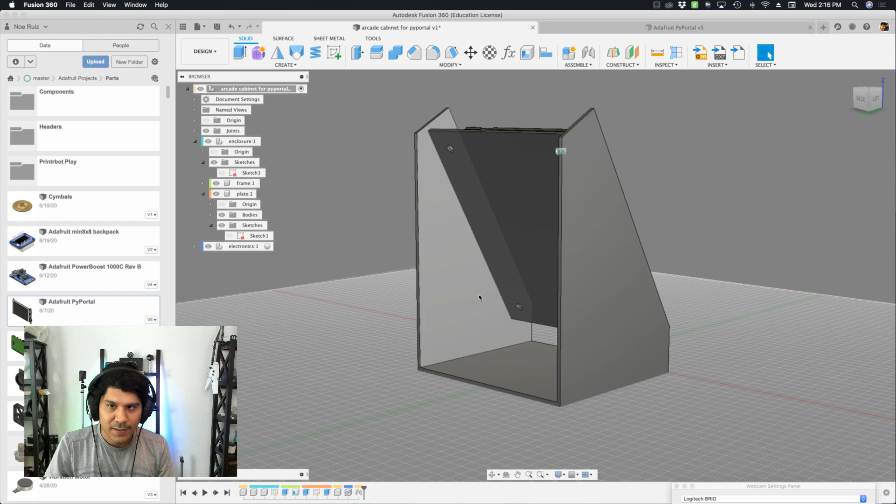So that's looking pretty good. At this point, we can create those mounting tabs and all this stuff, but really I just wanted to create the bare essential of our arcade style stand for our PyPortal. But that's really the main gist that I want to do. Now you can start adding all the features that you need now that the main stuff is done.

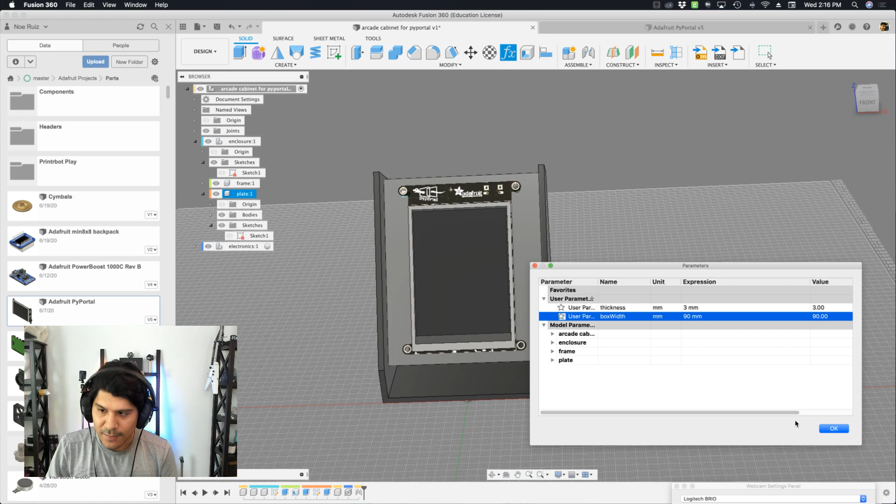Again, we did use some user parameters here. We got thickness. We want to change it up to 3. Everything gets updated here. So now all the plates and the frame are both thicker. And then we can change the width, maybe we want to go a little bit wider. That's looking okay too. And all our holes should be the same since we use the measurement tool there.

But that's pretty much how I set up the enclosure for the PyPortal. It's only just a handful of features in the timeline, which I like. That means you can modify the sketches here and everything gets updated really quick, which is pretty cool.

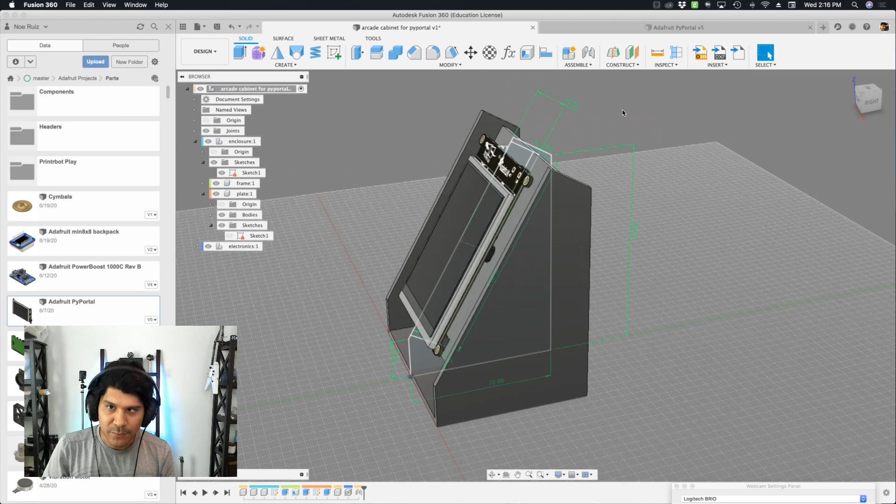So that's really it. I hope this is useful. If you guys have any questions on any of the stuff I covered, please leave them in the comments.